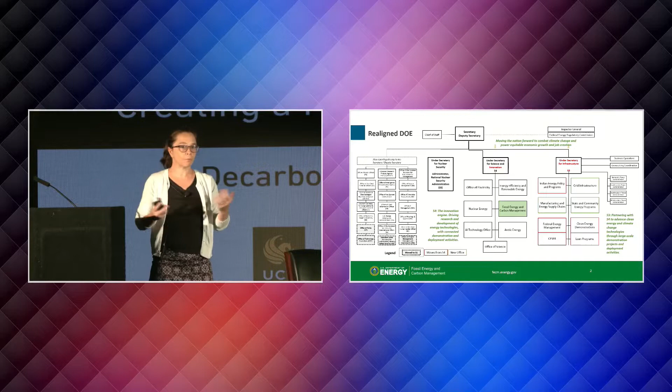So the infrastructure law funding is building the first-of-a-kind demonstrations. And the IRA, the Inflation Reduction Act, is more the policy levers put in place so the private sector can now, in an economic way, have the incentives through 45Q tax credits and things like this to actually build the second, third, and fourth of a kind.

The final piece is the CHIPS and Science Act, which you might have heard of. Through that Act, the Office of Science at DOE is receiving $50 billion. The important aspect, though, is there's a difference between dollars being authorized and dollars being appropriated. The bipartisan infrastructure law dollars are appropriated - we are getting them. When dollars are authorized, that doesn't necessarily mean we see them right away. So it's great that there's going to be $50 billion authorized to the Office of Science to do more of this great work through the CHIPS and Science Act.

But we still need the bills to be put in place. We still need the legislation to pass, and then for us to ultimately see those dollars through appropriations. So those are the three big pieces of legislation that have recently passed. I wanted to share with you at a high level how the Department of Energy, in the last year, has restructured in order to create a sustainable path for not only having a place for those dollars to go, but making sure the dollars don't stop.

So by building these boxes, like in the infrastructure office, it allows Congress to put more funding into these in the future. I'm going to talk a little bit today about the dollars we have for hydrogen hubs, or for integrated CCS hubs or direct air capture hubs. But I don't want you to sit back and think, oh, there's only four. Are we going to be one of those four? Because the idea is we've built something so that there's not just going to be four, there's going to be more coming down the road.

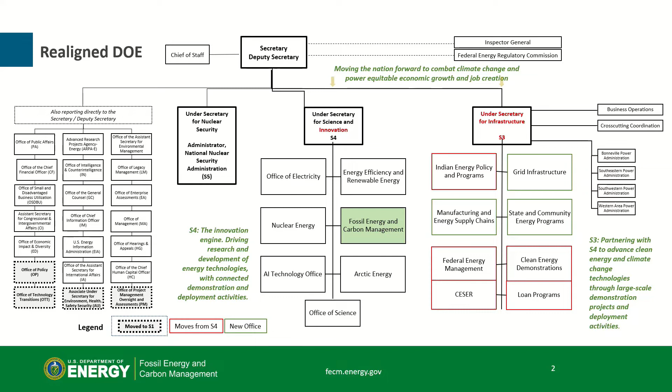Okay, so next I want to get into the heart of the office that I work for, fossil energy and carbon management. I came in at the start of the administration on day one as a political appointee on leave as an academic, a professor in chemical engineering from UPenn. I've learned a lot over this last year and a half now, going on two years.

One of the things I was asked to do was completely reorganize this office. It was previously the Office of Fossil Energy. The reason is we have an administration, the Biden-Harris administration, that has a primary focus on climate. But at the same time, especially with the invasion in Ukraine, recognizing it's not just about climate, it's also about energy security. So a lot of what we're doing in fossil energy and carbon management is making sure that everybody has access to energy equity, but also making sure that energy is affordable and clean. Everything we're doing is about investing in decarbonizing and reducing pollution of fossil fuels so that they can actually be part of the solution.

So we did flip the mission upside down in FECM. We added the two critical words, carbon management, to our title, and that took place on July 4th last year. Then the reorganization was completed - actually, I just looked at the calendar this morning, it'll be a year Monday. So September 12th last year, our reorganization was completed - the largest reorganization of our office since its inception in 1977.

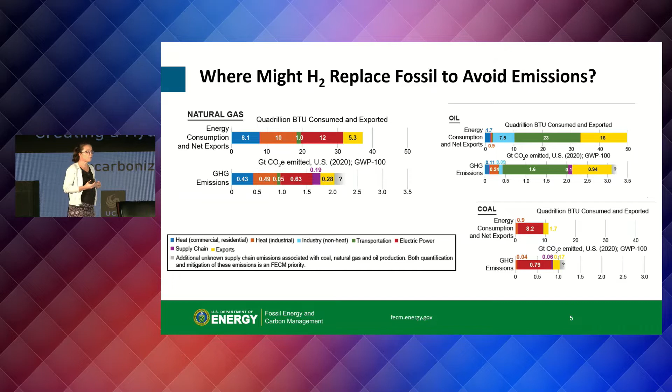And then finally, when you look at our dependence on coal, it's mostly associated with power generation today. So also through the bipartisan infrastructure law, we have 2 projects that will be funded with CCS on coal-fired power plants as well.

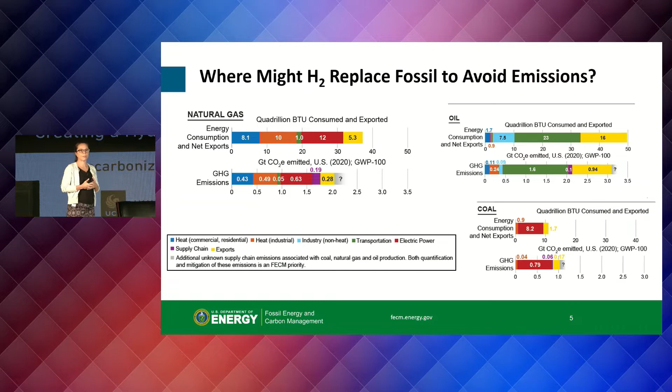And that's where we also have our hydrogen with carbon management program. So all of the things that we do in this division, we look at, for instance, how we make hydrogen from different feedstocks, whether it's from biomass or natural gas, just hydrocarbons as a feedstock.

But then we also ask ourselves, what do we do with the hydrogen? Is it for power generation, for instance? And so we have in our office also work on advanced turbines, which I know is exciting to meet some of you who have received funding from this division, which is exciting. And so that's another area.

We're working also with our other partners across DOE, like EERE and nuclear, recognizing that technology, if it's 100% firing of hydrogen, shouldn't matter what color it is going in. So we're trying to really leverage and do more cross-cutting work with advanced turbines, advanced materials for harsh environments. And then finally, an important piece is sensors. We often think about sensing as being able to improve efficiency of a unit.

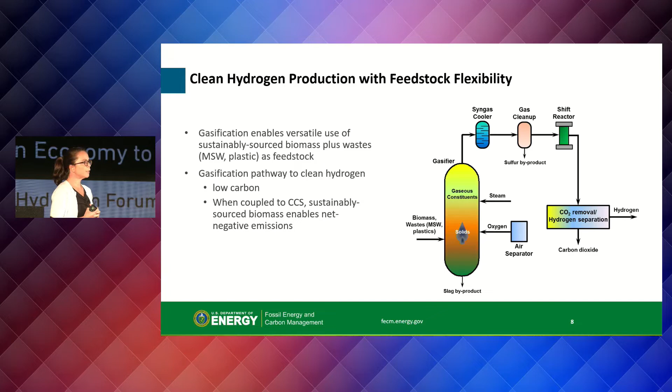Some of the work, when we think about gasification, is also recognizing that gasifiers are a unique technology where you can put a lot of things in, mixed feeds. There's a lot of R&D work to do on these units, since the mixed feeds could be waste plastic, biomass, or coal. So a lot of the work we're doing is investing in advanced gasification processes.

You've probably heard we have a series of earth shots across DOE. The hydrogen earth shot was one of the first, looking at all colors of hydrogen, aiming to get the cost down to $1 per kilogram over the next decade across all the different aspects.

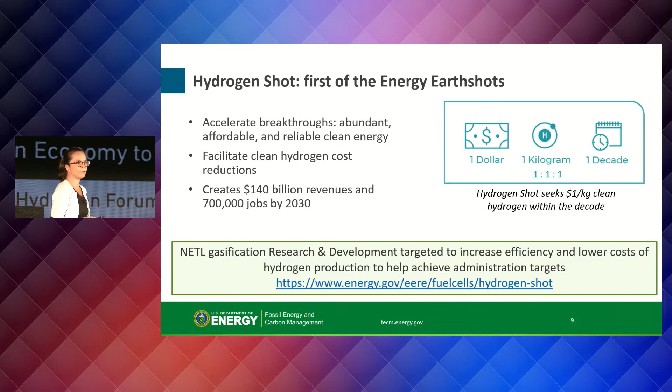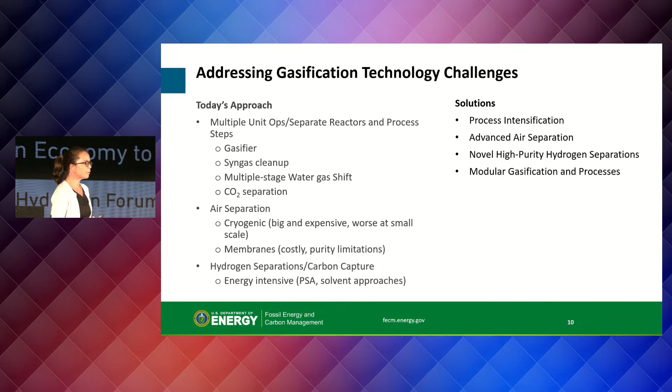Some of the gasification technologies and challenges we're trying to address involve the air separation aspect, which also applies if you have a steam methane reforming unit and want to retrofit it to feed oxygen for deeper decarbonization rather than just carbon capture on an SMR. There are also integrated oxygen processes you can use, like air separation and chemical looping as ways to bring oxygen into a system. These are all approaches we're excited about investing in today.

You might have heard of funding opportunity announcement 2400, an open opportunity announcement we continue to keep. When I talked about the budget expansion before, our Office of Resource Sustainability, which deals with the production of fossil fuels, now has a new hydrogen program as well.

The reason for that is when we look at the production of oil and gas, there are cases where it's truly hard to avoid methane emissions. It's not cost effective to bring in gathering lines or infrastructure for the methane, but we still need to deal with it. So the concept of developing mobile methane-to-hydrogen conversion processes, or methane-to-ammonia conversion processes, something you can actually deploy in the field, is something we're now excited about and investing in under the 2400 FOA.

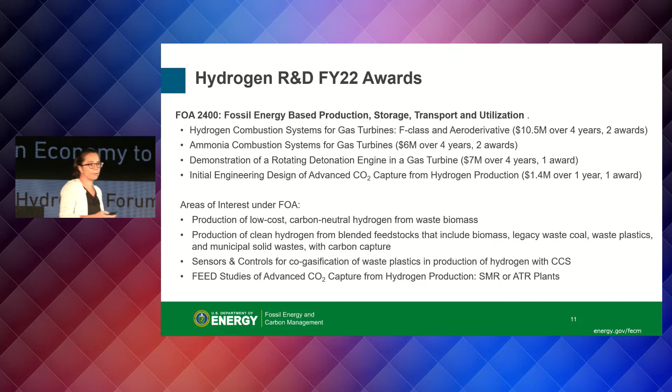The other piece is when we think about the agricultural sector and other natural methane emissions that take place on earth, we could imagine these same approaches going into the field, harvesting that methane and converting it to something like hydrogen or ammonia that's more useful.

Just some examples of investments we've made in low-cost oxygen through different separation processes using adsorption, pressure-driven oxygen separation, cryogenic separation, and even molecular sieves and hollow fiber membranes.

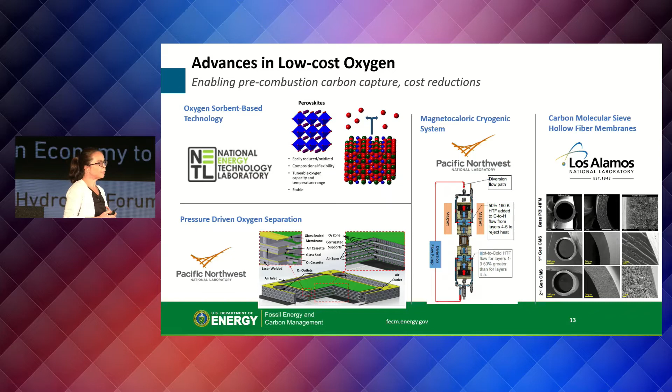Wanted to talk a little about this concept too: sourcing hydrogen from biomass. When we look at opportunities for decarbonizing industrial sectors like cement and steel, we know direct reduction of iron with hydrogen, for instance, or bringing in syngas so the kinetics might be better for direct reduction of iron. These industries are hard to decarbonize and often require high quality heat.

The other piece is that a cement kiln isn't always firing one fuel. It will fire coal, gas, maybe even diesel, or waste tires. There are about 91 cement facilities across the United States, as outlined here.

They collectively emit roughly 67 million tons of CO2, at least back when I had this data, I think it was 2020. So just as an example with cement, there's drop-in fuels for coal, like biomass. Turns out nutshells have a very similar carbon structure to subbituminous coal, and the same carbon density and pore structure, so you get similar oxygen transport through the materials. Being able to use these waste biomass feedstocks as a drop-in fuel for the solid fuel, and then using hydrogen as potentially a drop-in fuel for the methane or natural gas, since it's only a fraction, maybe 30%, of the kiln fuel.

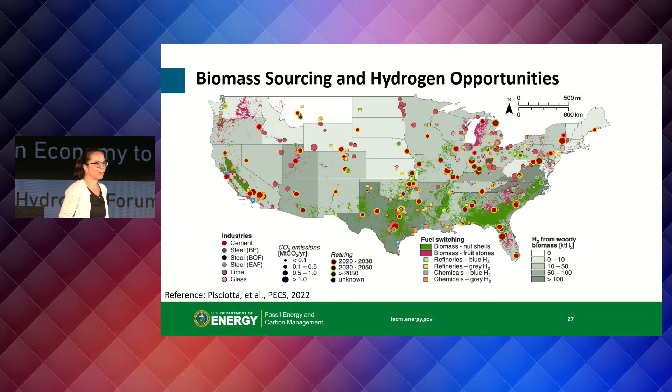So I say that's low-hanging fruit. There are a lot of these opportunities where the chemical companies are making too much CO2 regionally, and there's just not a market for it. Of course, we didn't see that with COVID and the vaccines and dry ice, but we saw a shortage, actually. But you do see this opportunity.

And so when we look at fuel switching, you're looking at hydrogen, looking at waste biomass that may be available, you actually have regions in the United States where you can even go negative in terms of the carbon emissions associated with these hard-to-decarbonize sectors today. So it's really, I think, creative to think about what role hydrogen can play with other drop-in fuels to help us decarbonize these really tough industries.

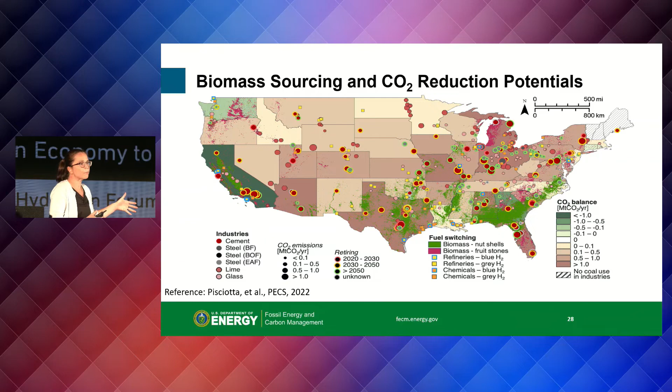The last thing I'll say about this is that when you think about something like cement, and certainly steel, you recognize that those facilities need low barriers to transition because they have a customer base. And the customer base is expecting a certain quality of the material, and that formulation is so important. So you can't just overnight switch to an electric kiln or switch to something, because that disrupts the industry. So when you do things like this, it's pretty creative — it allows them to keep their infrastructure and also maintain the quality of the product.

One thing I want to mention too with hydrogen is the other carbon negative shot, which is carbon removal. And again, a big area is looking at hydrogen, how it reacts with CO2 for synthetic fuels.

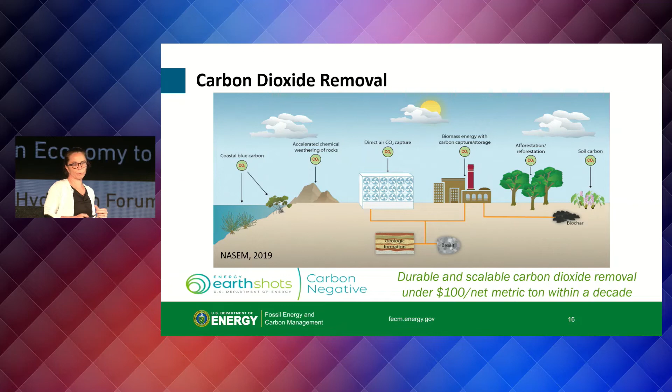Also wanted to mention this is the bipartisan infrastructure law. I've already talked about this a little bit, but there are 4 direct air capture hubs at $3.5 billion, looking at carbon storage and validation for $2.5 billion. What we're hoping to get from that funding is building out the infrastructure for CO2 sequestration across the United States that scales to 60 to 100 million tons of CO2 injection per year. So if you're thinking about a hub, if you're thinking about blue hydrogen and thinking about what you'll do in terms of managing the carbon dioxide, this is funding that's available to help build out the infrastructure so that you can make the blue hydrogen.

And then I also mentioned the hydrogen hubs through the infrastructure law funding, $8 billion for at least 4 projects, including one with fossil fuels and carbon management. And then also wanted to give an update a little bit on the diversity of the feedstock, also end use diversity, geographic diversity, and finally...

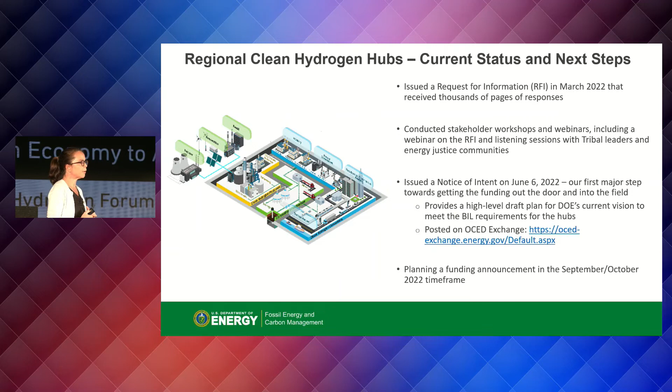This is just the current status and next steps. So we issued a request for information back in March, and then a notice of intent in June, and we should be sending out the funding opportunity announcement in the coming weeks, which is exciting. So thanks again for having me here today, and looking forward to a Q&A if there's still time.

We have questions coming in from both audiences, so we're going to tag team on those. I'll tee up the first one, and it has a lot to do with being here in Central Florida. We had a chance to talk about the entertainment industry, transportation, the ports, being known around space and aerospace, and being central in defense. So we have a very interesting community, a very interesting region. Maybe share your perspective on building these ecosystems, how the department sees those things and partnering with industry and academia. And I think it would be good for us to hear a bit about energy equity and what that really means.

Absolutely. So the first question, thinking about a hubs concept, I think it's important to recognize that every region has a different pathway to achieving net zero, and every region has their own challenges associated with land, low carbon energy, and water. But those are all considerations you have to bring into the equation. So some of what we've been working with the national labs on is leveraging what these pathways may look like for different regions of the United States, because the labs are strategically placed across the US.